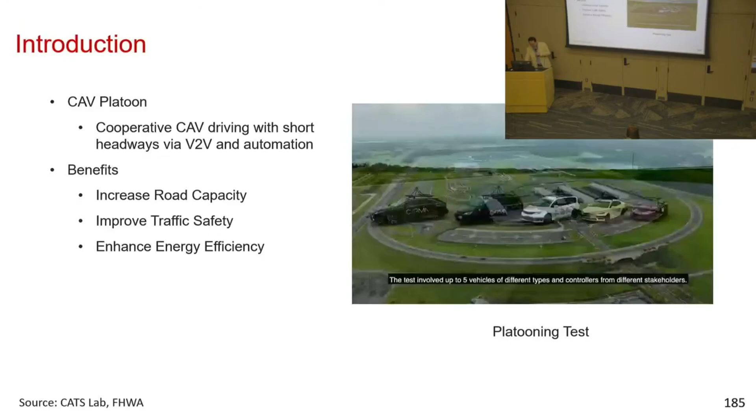So everyone knows what CAV platooning is. It's cooperative CAVs driving with short headways via V2V communication and automation. This is a video clip that the FHWA Turner-Fairbank Research Center made, including one of our lab vehicles. That's the red vehicle you see there. It has lots of benefits like increased road capacity, improved traffic safety, and enhanced energy efficiency.

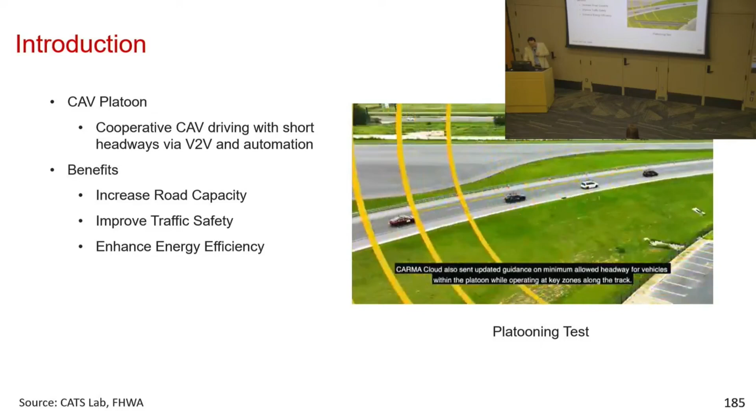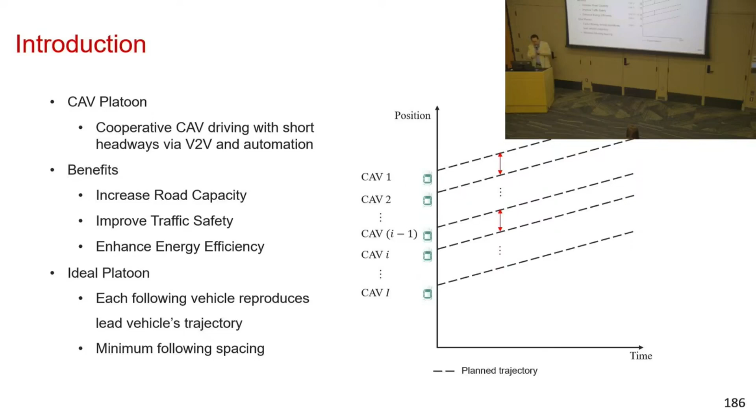So ideally, what a platoon does is you have a platoon of vehicles, and the following vehicles are just reproducing the first vehicle's trajectory. Ideally, they want to make these trajectories exactly identical, and this way each vehicle can follow another vehicle very closely without much gap. That's going to generate lots of benefit. But why haven't we been there? It's because of the control error, actually.

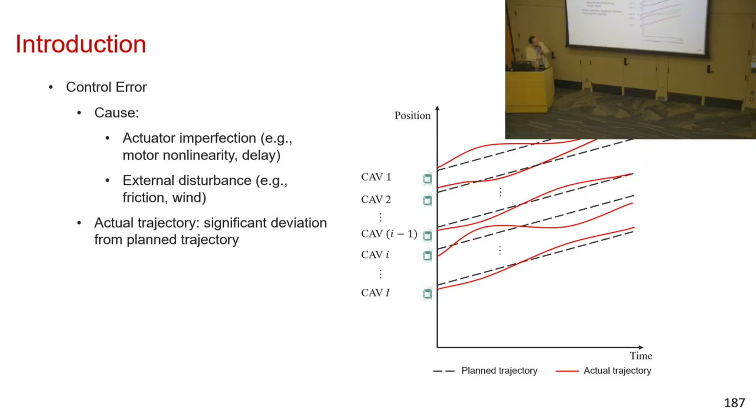There are lots of causes of control errors, like actuator imperfection and external disturbances, friction, wind, and other things. If that happens, your actual trajectory is not going to be as ideal as the planned trajectory. There are going to be some deviations, and in the worst case a collision could happen. So how to mitigate that? So a compromise is

Sure. All right. Sorry. Sure. All right. So the... maybe all right. So is the voice okay?

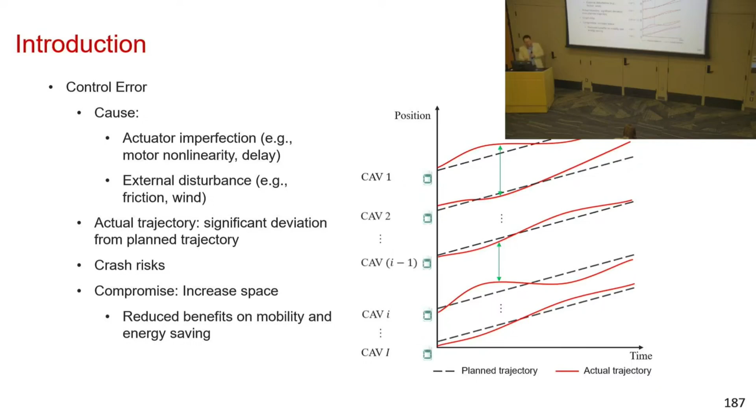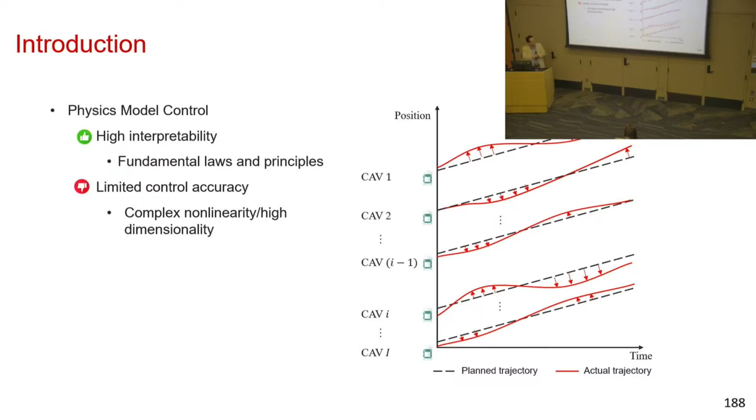All right. Great. So the compromise is that you have to increase the platooning spacing, and that's going to lose all these benefits we mentioned earlier. So how do we address it? Before addressing it, let's look at why it happens. A lot of platoonings are based on, like this morning's debate, rule-based, model-based control, and some of them are even linear. These models are good for interpretability, but they have limited control accuracy. They cannot capture complex nonlinearity or high dimensionalities. Therefore, the actual control deviates from the planned trajectories.

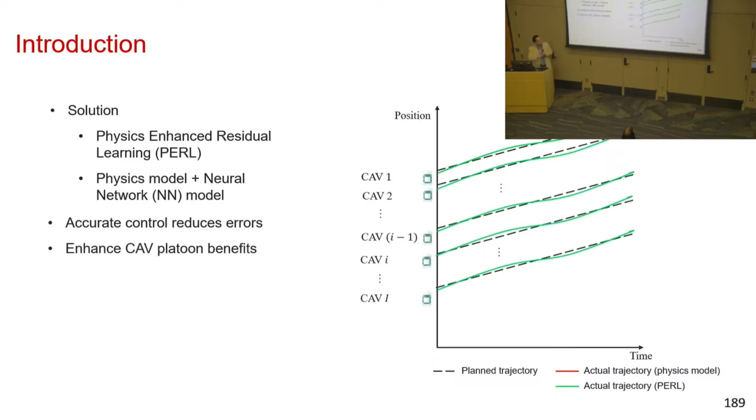So how do we mitigate this? We propose to augment the physics models with neural networks. The physics model may generate an imperfect trajectory, but we can augment it with a neural network to dampen this kind of deviation and make the trajectory better follow the planned trajectories. This way we can close the gap. All right, how do we do this? I'll be really quick here, but I'm going to introduce the physics-based models. So this is where we start.

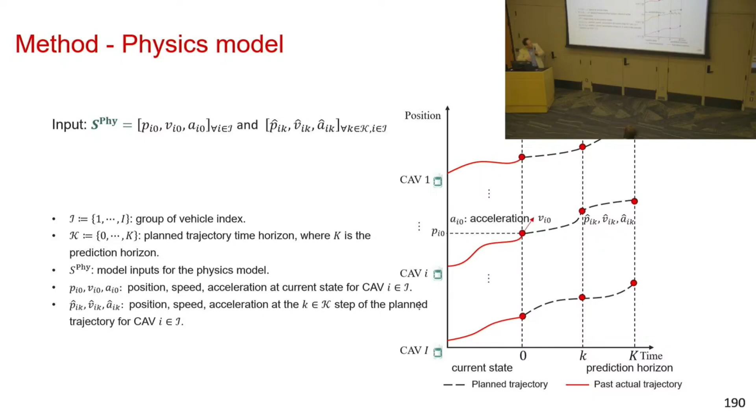The current state is P for each vehicle i. The current state includes three: this is location, this is velocity, and this is acceleration. And these are the location, velocity, and accelerations in the future time steps. Basically, you start from here, and each vehicle wants to follow its planned trajectory. The output, our control, instead of acceleration, goes directly to vehicle RPM because we want to implement it on physical systems. So revolutions per minute is directly controlled on the vehicles.

All right. This physics model is just the mapping from the state to the final control output, RPM. It has two components. Inside is model predictive control, and outside is a linear mapping. So let's look at the model predictive control part. It converts the states into the MPC output, which is a speed command, or acceleration.

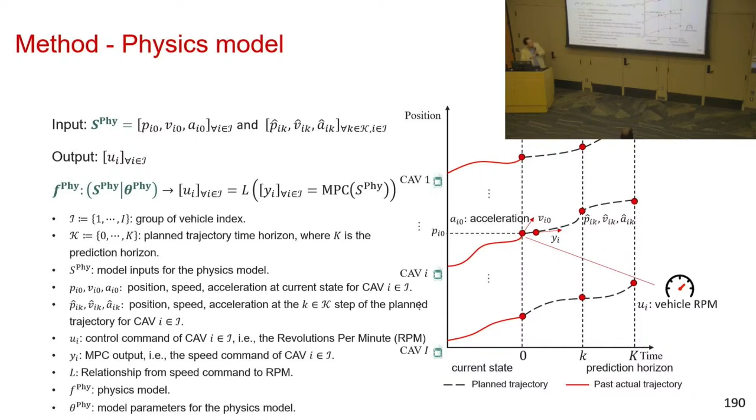And that is not direct vehicle control, which is RPM. And we have to convert this speed control to RPM with a linear function.

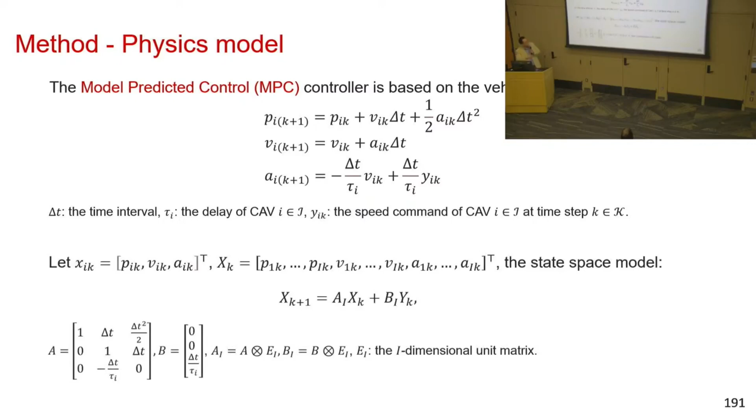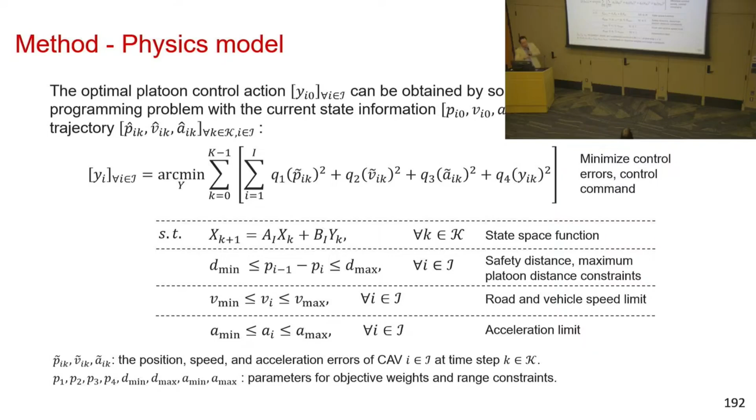All right, so MPC, I'll be really quick. It's going to look into the vehicle dynamics, and we actually concatenate these vehicle dynamics into matrices anyway. And eventually, we're going to find the best control, which is the speed control function, that's going to minimize the error between the planned trajectory and the actual trajectory.

All right. So after we get the MPC, we should be able to get the speed command. But the speed command is not the final input. The final input is RPM. So we're going to use a linear relationship that can be obtained from the data. However, this linear output is not very accurate. That's the very reason why the control deviates from the planned trajectories.

There is a residual term that could be affected by turning rate, and also battery status, a lot of other factors, right? Think about all these uncertainties and complex factors involved in these control processes. Even wind and other things, right? So in this study, we just focus on turning state and battery status to start with.

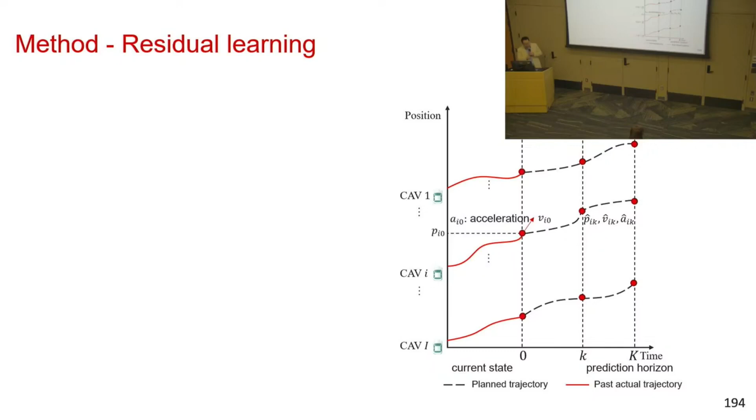So next we need to address that residual term. What we do is use residual learning to estimate the difference between the physics model and the actual estimate. The input includes the same thing. Besides that, we have extra factors like turning rate and battery status to incorporate the impacts of these nonlinear factors. And the output is the residual item, which is the difference between the physics model input and the ideal control input of the RPM.

So we're going to use a standard multi-layer perceptron, MLP, structure to estimate this U bar, which is the residual item. After that estimation, the overall framework is simple. It's just using physics models to predict the first-order prediction of the control variables, and then using a learning term to get the residual, and adding them up together. We hope it can get better control results.

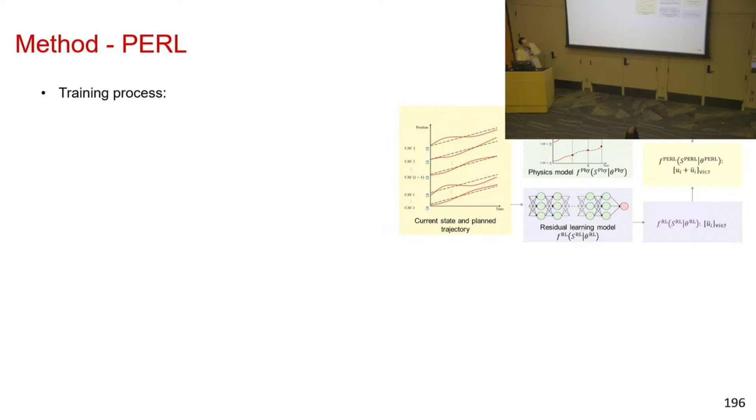All right, so this is a model that starts from scratch. How do we make the model work, and how do we do the calibration? First we calibrate the linear component with least square error estimation, linear regression, whatever, to determine its relevant parameters from the offline data. Then we run this CAV platoon and collect real-time data to do some online adjustment, given that battery level changes over time, right? Other conditions change over time.

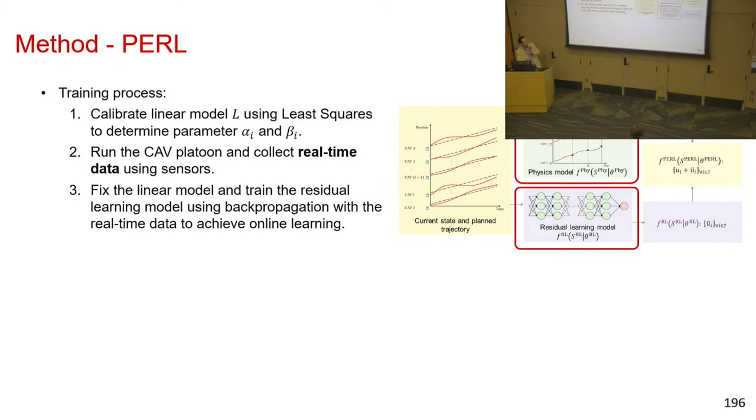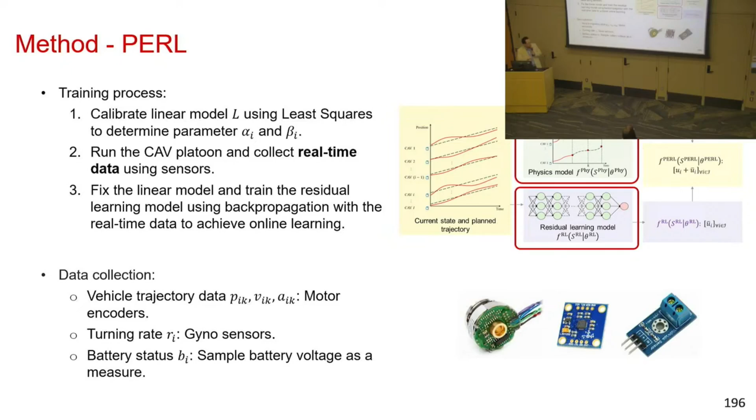To do that, we fix this linear model and train the residual learning model using backward propagation with the real-time data. So how do we get the data? I'm going to introduce it later. We used a physical platform, and we used some sensors. Anyway, let's look at how our system works.

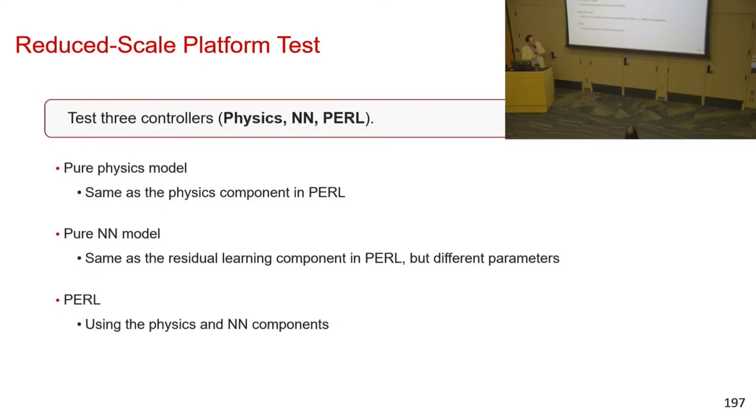We're going to use a platform to test three types of models. First is the pure physics model, the one I showed before. Second is a pure neural network model, without any physics input. The third is PERL, which is what we proposed, physics enhanced residual learning, using the physics plus the residuals. Let's look at the results.

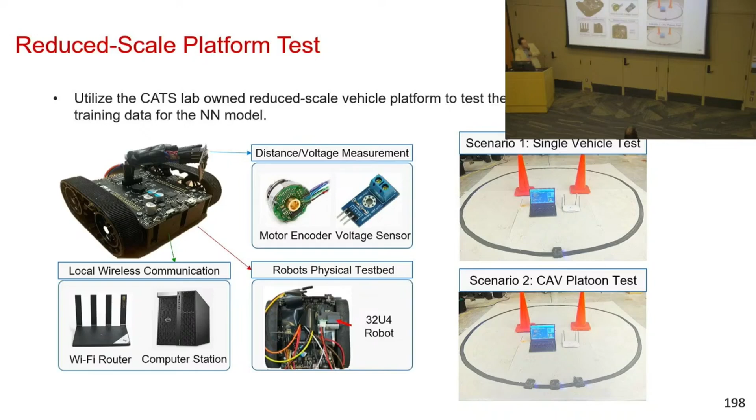So what is the test platform? We actually started with these small vehicles. They're easy to play with and safe, and also it's quite challenging to control their accuracy. So we have this hardware, and we have two scenarios. The first scenario is to train a single vehicle to follow planned trajectories, and the second scenario has three vehicles following each other to create a platoon.

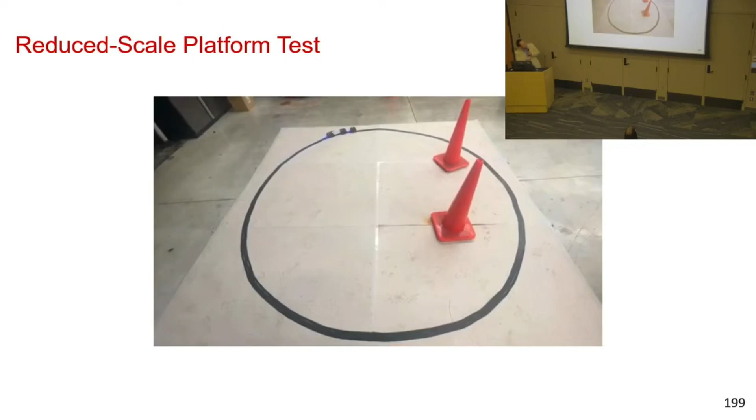And this is a video of three-vehicle platoon control after we apply the results. They can closely follow each other, and sometimes they may vary the speed and the spacing. Like in this part they may accelerate. Yeah, accelerate, and then they're going to try to get to a platoon.

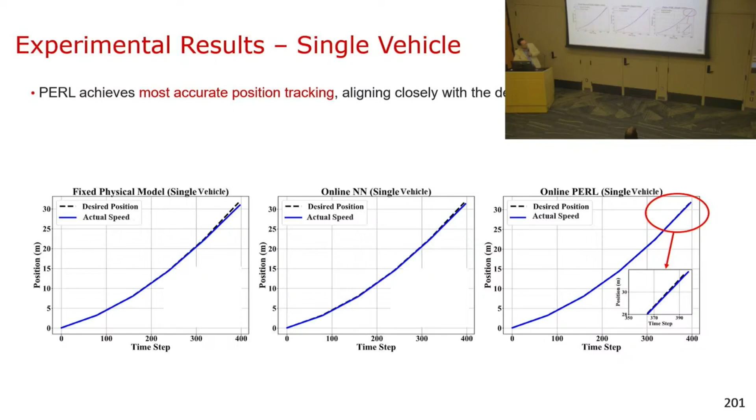All right, so this is actually a view from the location trajectories. We can zoom into this part, and we see actually for the PERL model, it works pretty well. The planned trajectory overlaps with the actual trajectory. For the physics model, there is a big gap. Neural network, there is some gap still, although smaller than physics models.

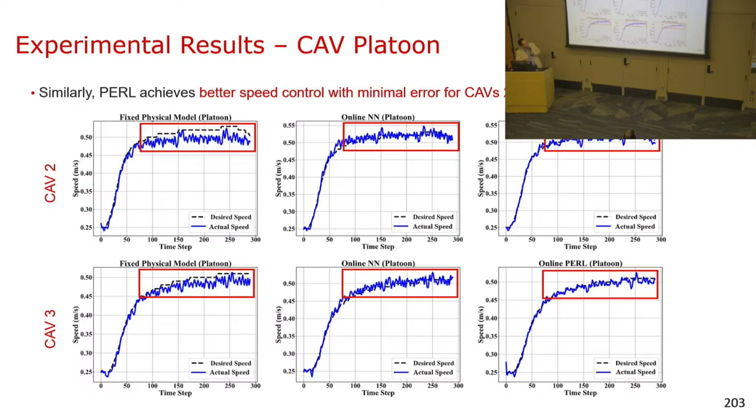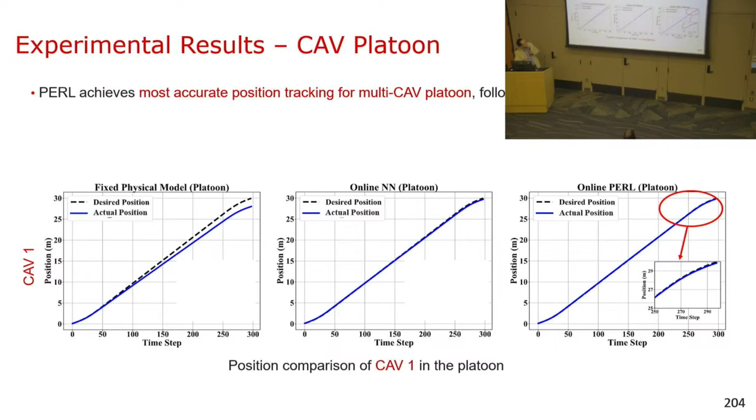These are vehicles 2 and 3, and you can see they still follow the same pattern. So PERL is the best, the physics model is the worst, and the neural network is in between. We actually look into the location tracking of these vehicles in a platoon. You see, the physics model has some cumulative error and doesn't do very well, but the neural network does better, and our model does the best. These are vehicles 2 and 3. They follow the same trend.

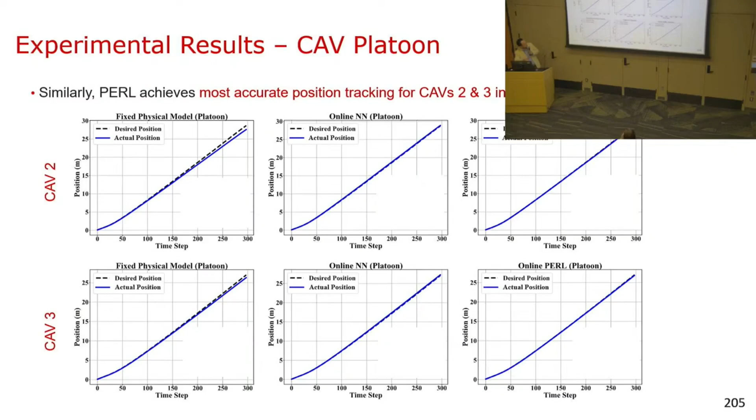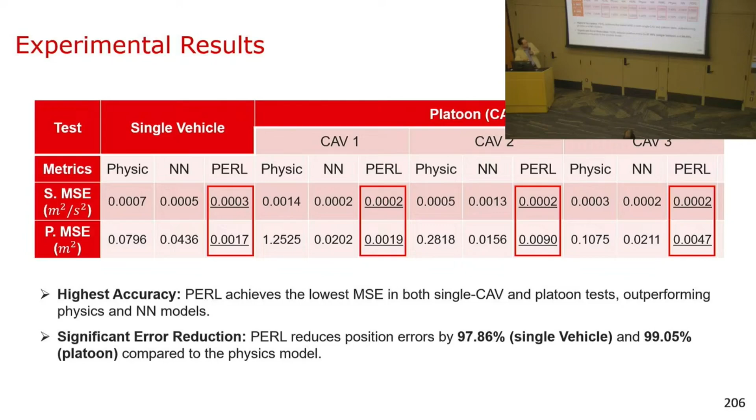So we have done a test with the toy vehicles, and we also mentioned we have a fleet of real vehicles we want to test, and also thanks to the Mcity 2.0 platform, we have proposed our request to do some tests with their facility. We hope to do some of these experiments. This first step is just to know how to exactly and accurately control the vehicles.

Besides forming platoons, accurate vehicle control can be used to better measure roadway friction. And this is the year 2 project. We are still in the process of getting more results, but I want to spend a few minutes to have Heye present the overall plan for that year 2 project, please.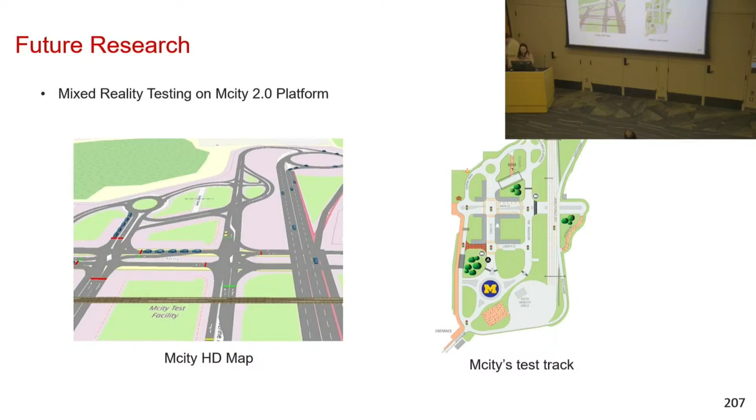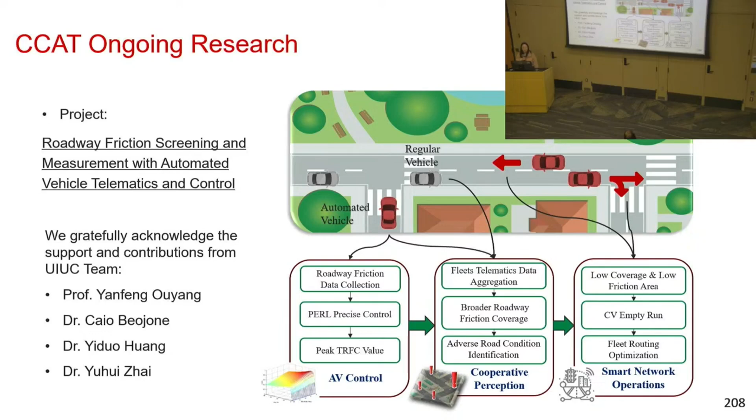Thanks, Professor Lee. Now I will be presenting our ongoing CCAT project titled Roadway Friction Screening and Measurement with Automated Vehicle Telematics and Control. This project aims to use the data from both regular vehicles and automated vehicles to achieve accurate road friction screening and measurement. We gratefully acknowledge the team from UIUC, Professor Yanfeng, Dr. Caio, Dr. Yiduo, and Dr. Yu Hui, who have supported our project with regular vehicle data collection.

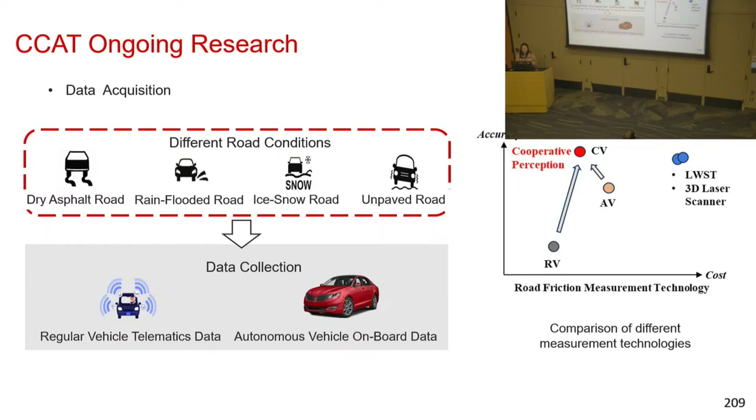So in this project, we focus on collecting data from both regular vehicles and automated vehicles under various road conditions. So why do we need to collect data from both sources? In this figure, we can see the collection methods have different cost and accuracy. So we want to find a balanced way to achieve both low cost and high accuracy. So we collect data from both sources.

With this data, we want to obtain the peak TRFC value, the tire road friction coefficient. This is the basic function of the friction coefficient and the slip ratio. So if we want to achieve the max road friction, we need to find the peak value. So how can we do that?

We have already collected data from regular vehicles and automated vehicles. As you can see, the purple sampled data are collected from regular vehicles. If we collect data from these vehicles, we can fit the curve of the slip ratio. So we can get a smooth curve, but we can't find the peak.

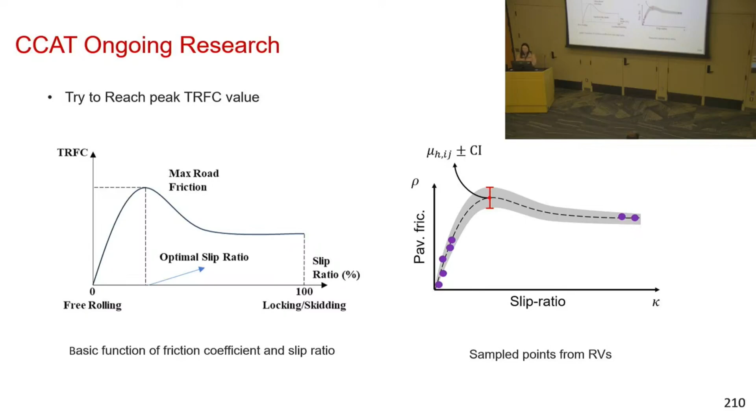So if we can use the accurate and precise control from autonomous vehicles, we can get the peak values. That's the value that can be calibrated from both regular vehicles and autonomous vehicles. Here is a simple case study where we collected data, the regular vehicle data from the Champaign County main road. As we can see in the right figure, this is a traffic pattern obtained from the traffic count sensors.

So in conclusion, if we can do this project, finally, what we expect is that with this project we can achieve accurate road friction measurement, and with accurate road friction measurement, we can lead to a much safer transportation system.

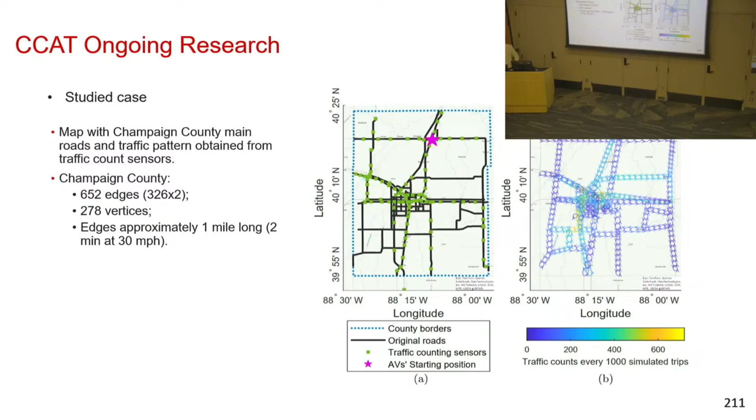Second question is about platooning. In a real life situation, there are, again, so many factors, such as grade. Based on your presentation, I'm not seeing those critical environmental conditions. In the lab, the model can be simple, but in real life it can be very different. The neural net looks very good, but it needs to account for actual driving conditions. How do you do that for real life applications, in real time?

Sure. So, in short, first question: friction. We do online estimation. So the friction the vehicle measures at that moment is specific to the vehicle and the road condition. So of course over time it's going to have variations.

As for platooning, now we have the framework. We only consider two factors, but we have three dots over there. That means if you add more factors, you just need to measure them and put them into this framework, and it's going to make the model even better.

Hi, Professor Lee. Thanks for the presentation. I also have a question about this research. What are the advantages of using MPC with residual learning compared with pure model-free methods such as reinforcement learning?

Yeah, MPC can actually solve for the exact optimal solution. Reinforcement learning is essentially a heuristic. Your question is the difference between reinforcement learning and MPC, right? And also the reason we use MPC is that it gives some intermediate output like velocity, but we still need some transfer to get to the final direct output. But we think MPC is fast and exact, and we have a neural network following that to capture the part that MPC doesn't capture.

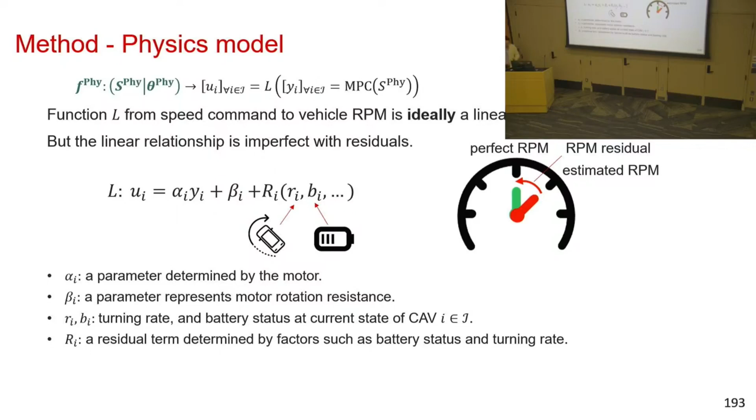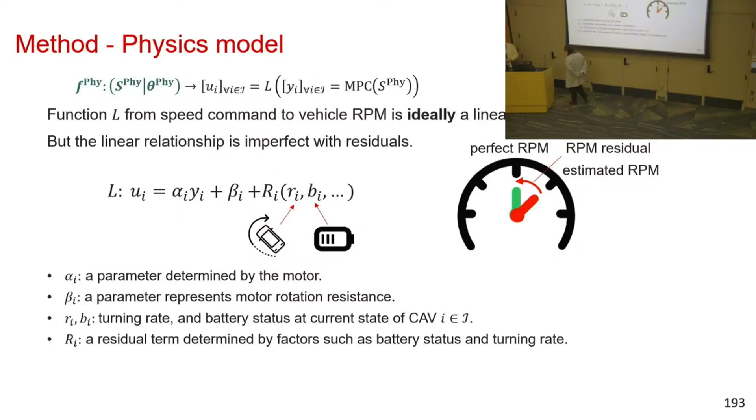So I just had a question. Did you try the stop and go behavior for the residual model, like accelerating and decelerating? Did you try stop and go where one of the vehicles stops and then starts going again, and the vehicle behind also stops?

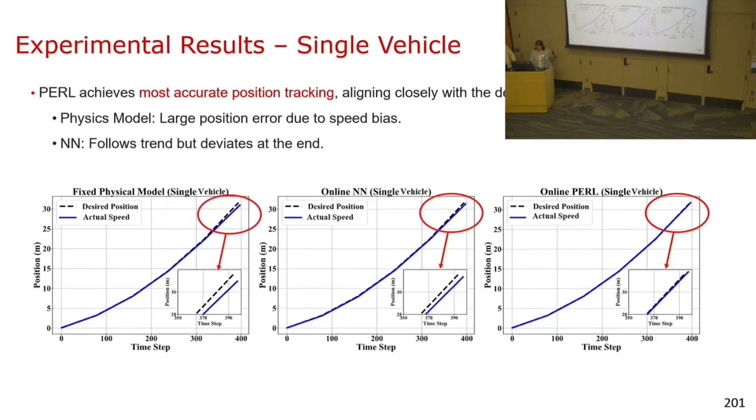Yeah, we don't have, sorry, can I use this? So here we change the speed. It's not exactly from stop to go, but we have speed changes, which create traffic oscillations. You see with our method it can react to the stop and go fairly well and reproduce the results. Of course, it's not going to be as ideal as a constant speed, but still it performs fairly well.

Another question. In the video that you showed, what are you using for steering? Are you using the same turning rate for the vehicle to steer, or is there some other algorithm where the vehicle is able to make those turns? We use the default algorithm. They have some line tracking algorithms, but we use that turning rate as input to revise our longitudinal control platooning to make it perform better.